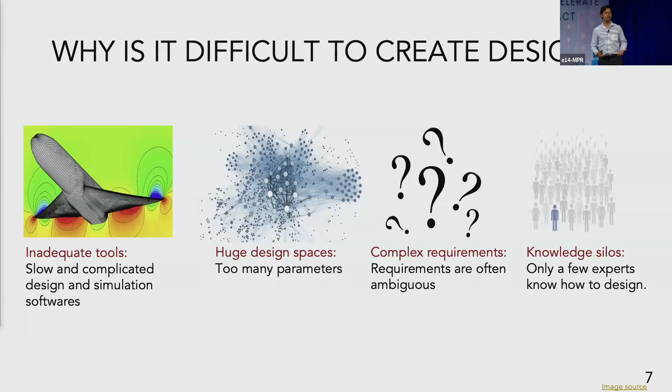So there are these knowledge silos in a lot of different organizations, and there is no general repository of all manufacturing knowledge, or manufacturing knowledge to create product X. Now, what I'm going to talk about is how can AI enable humans to create better designs faster, with a specific focus on deep generative models, which people often call generative AI. This is a topic we have been working on for a while.

Similarly, other fields, not just images, like generating code: you can go and write a small code and it will fix bugs, write comments, autocomplete your code. And that is something a lot of departments in computer science are grappling with: what do we do, how do we teach our new students coding skills.

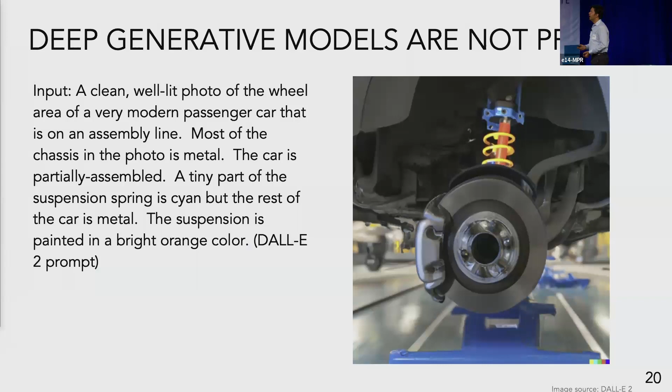And I thought, maybe I'm not giving the model enough opportunity, so I wrote a very detailed input of how to create a suspension system, and it came up with this image, which looks very realistic. But if you really look at it, you will see that there are issues. There are missing lug nuts, there are floating components. The key issue comes time and again in different areas: these models don't understand precision, and hence they cannot satisfy constraints.

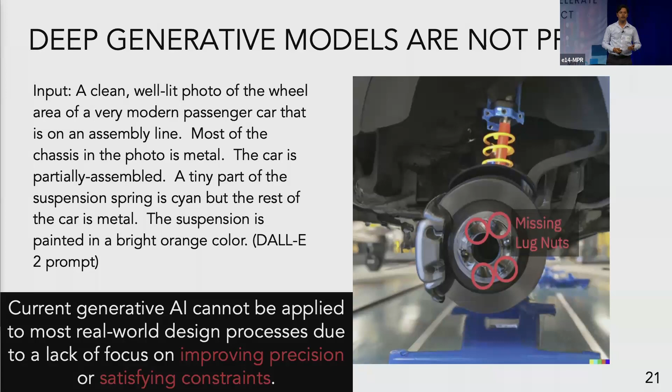And in this case, I'll show you examples of aircrafts, airfoils, bicycles, cars, and so on. And we noticed that these models really lack a few things. For example, first is performance. Unlike a human face, which has no performance which you can associate, we can run simulation models in a lot of engineering design products to understand how well they perform. Novelty is how unique you are. And constraints are, depending on the domain, how do you satisfy those constraints?

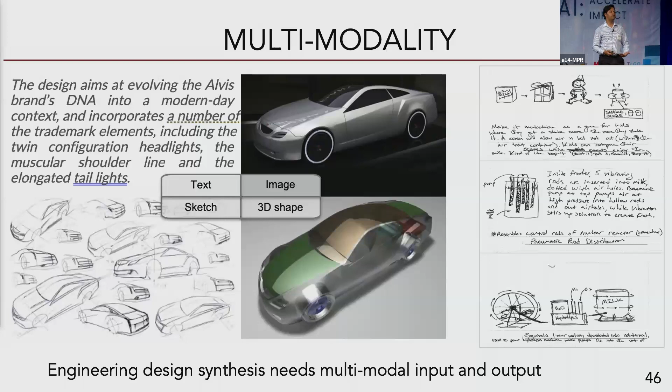But the data sets we currently have, most of them are unimodal. And as a result, the best machine learning models which we are developing now are kind of limited by design. And I think that's something which the community should be thinking about, on where we want to take manufacturing next and design next.

We have been working with this bicycle CAD company called BikeCAD to design bicycles. We have developed a partnership with them where we created a huge multimodal data set of bicycles where we can look at a person's dimensions and understand what is the best bicycle for them based on the designs that have been uploaded on the internet by different frame builders. And this involves looking at generative modeling as well as understanding the physics of the structural integrity and CFD simulations.

Great. And again, I think a key factor in this is not just looking at the images, but looking at parametric information and CAD models to understand the 3D structure of these structures.

One challenge with all of these, which you will often see, is this idea of thinking beyond statistical similarity. Because most machine learning models which we see are developed for statistical similarity, which means they are trained to generate things which are as similar as possible, statistically speaking, to the original data set distribution that was given. But in reality, in manufacturing, you have to think way beyond statistical similarity. In design, you have to think about other things: performance, constraints, diversity, novelty. And unless we change our paradigm, the models will somewhat be limited.

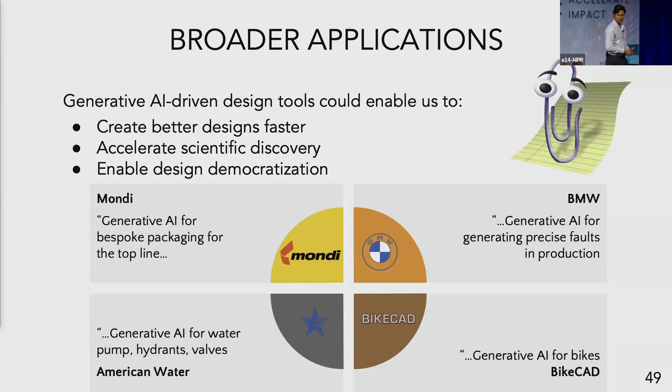So just to wrap up, generative models, I think they have a lot of promise for creating better designs and accelerating scientific discovery. And we have been talking to a bunch of industry partners who are looking at these models and are interested in this whole idea. And I already started talking about going beyond statistical similarity, like this idea of how the models are constrained.

And one thing we have been looking at is trying to map this space of metrics that are important for engineering. I already mentioned a few of them: exploration, constraints, performance, and conditioning. And what do we do? Let's say we understand the metrics. If we understand the metrics, we can first quantify how good the models are. But we could also go back and change the existing models to promote generating designs that perform well on these metrics.

So in this particular case, one problem we had been looking at is topology optimization. And within topology optimization, there is this problem of generative optimization, which is using classical SIMP type methods to create designs which are optimized for some structural performance. Now, these methods have been around for a while, and they are great. However, often they do not guarantee an optimal solution and are computationally expensive. So we had been looking at, well, what if we already have a lot of optimal structures? We can maybe learn from those optimal structures and create new optimal structures.

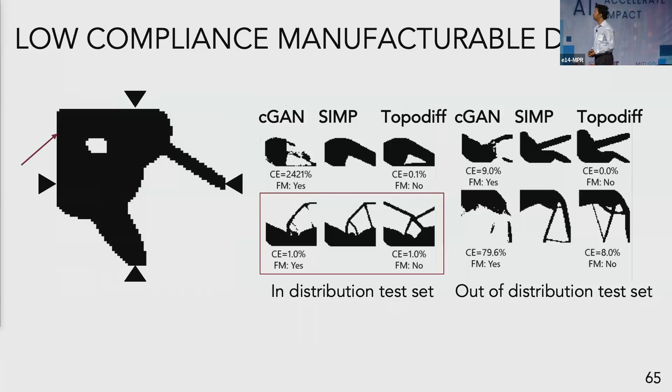So what we show is that we can perform well on these low compliance manufacturable designs, but right now a lot of work is going to much more complex problems, 3D problems and high resolution problems, and where generative AI can help with these problem sets. Something we have often seen, related to the idea presented earlier, is that you don't need to pick between deep generative models and optimization. You can really combine the two. And if you combine the two, the performance gains are huge. In our recent paper from IDETC, we showed that we can get 10x improvements over the sampling time of diffusion models. So some of the takeaways were how can we look at these models, combine them with optimization, and learn from the engineering domain.

Last but not least, I wanted to quickly touch upon this idea of linking digital and physical designs. Now, in mechanical engineering, machines are very important, and linkage systems. Have people heard of linkage systems? Any mechanical engineers here, by the way? Oh, great, awesome. So people know.

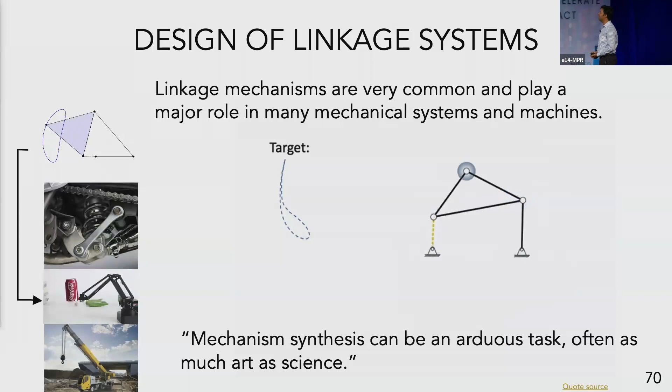So this is my student trying to come up with a linkage mechanism which can create that curve. You can see the process is really, really manual. You have to change things. If you're interested, you can go on our website and play a game. I've tried it in a lot of classes. Most students give up after the first example. There are 5. So you can try creating these mechanisms. And if you look at the state-of-the-art software tools in the industry, this is the path we want to create. These are the mechanisms it gives.

It really fails to come up with very good designs that can meet these targets. And the issue is it's a huge design space with very, very complex constraints. So we started looking into this problem, and we said, first thing we need is data. So we created a data set with a lot of mechanisms, 100 million mechanisms, which was created using a very fast solver, and a lot of coupler curves, about 1 billion coupler curves.

And once we created this data set, we said AI models really shine when they have seen such complex problems. Just a simple search on the data set could actually solve all these problems pretty accurately. On the top, you have the previous models. Bottom, you can see a naive search. But we wanted to push ourselves. We wanted to say, what if we want to write an entire text like IBM?

Guess who the sponsor of the project was?

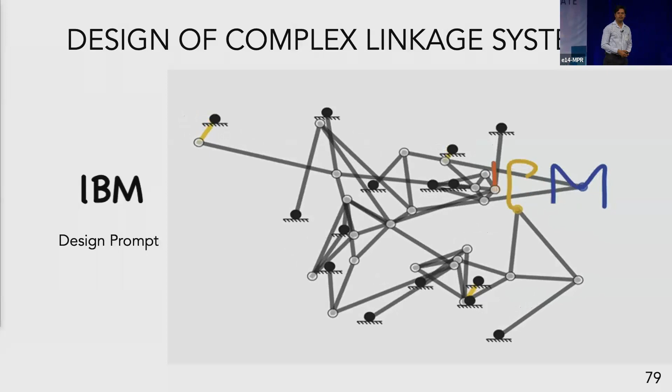So here is the solution, where we came up with a complex mechanism which can really work with writing IBM using a single motor. And this problem is extremely challenging because first, you're working in continuous and discrete spaces. Second, if you look at just one alphabet and you fix everything, I give you the solutions, only one node, the green spaces are what is feasible. So it's a very hard problem to solve.

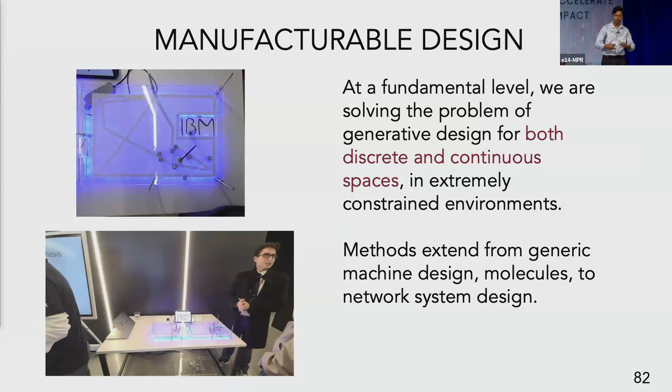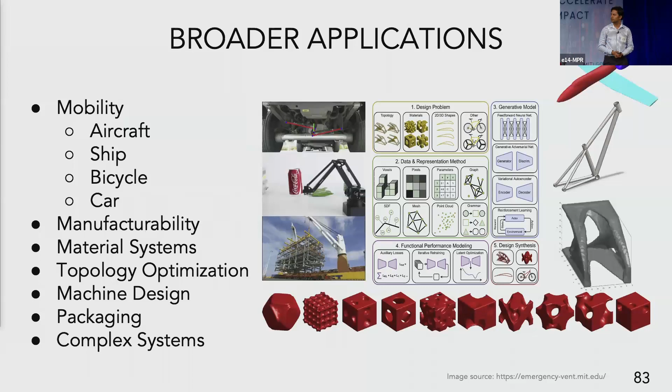Everything doesn't work. It locks. It's a very hard optimization problem. Like if I write down the equation of the M, it's about 590 pages of a book. And that's just one alphabet. And we incorporated manufacturable design constraints, and so on. The ideas are really applied to a lot of other areas around mobility, manufacturability, material system topology optimization, and complex systems. Moving forward, I wanted to just quickly touch upon this idea of design democratization.

Like I don't write poems very well. My wife can attest to it. I asked it to write a poem about kinematic design of linkage mechanisms. And it came up with a pretty good poem. Robotic arms with joints so fine, move with grace in a straight line. Machine learning is the key, it seems, and so on. Similarly, in art, you can draw a doodle, and it comes up with fairly good art.

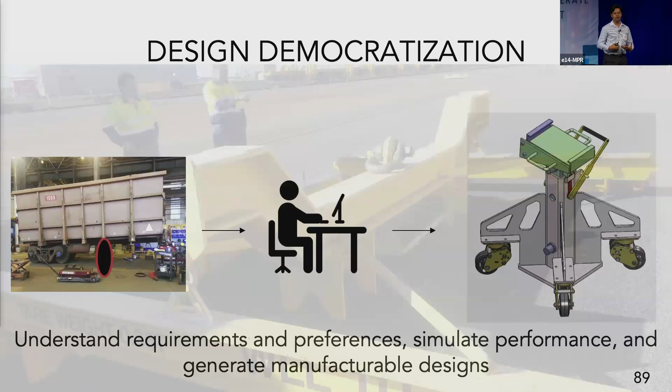So the question I'll present to all of you is, when can we get to a stage where we have design democratization, where people who are not necessarily trained as designers can go and come up with some constraints, and the model can really generate very complex designs.